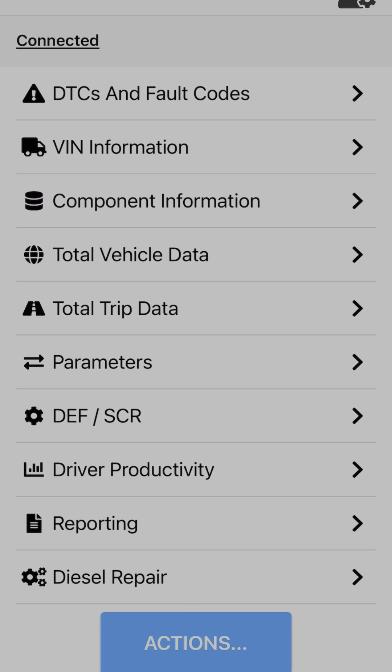So here we are opening up the TruckRx app, which is free to download either on the Android Google Play Store or via the Apple iOS Store. So we connect to our device. It's a Bluetooth connection. The first time you connect to it, obviously you have to set up a password and do some connection and identify it as yours. And sometimes there's an update that updates the firmware on the Bluetooth device.

But here inside your phone, you want to scan the fault codes, and you want to understand, okay, what's going on inside my truck's engine controller, transmission controller, brake controller, all the different electronic modules that talk to that 9-pin port under your dash. And you can see there's some fault codes, and my simulator is telling me that I got some engine hot shutdowns. It tells you the SPN number, and then the occurrences, as well as which item is causing the issues.

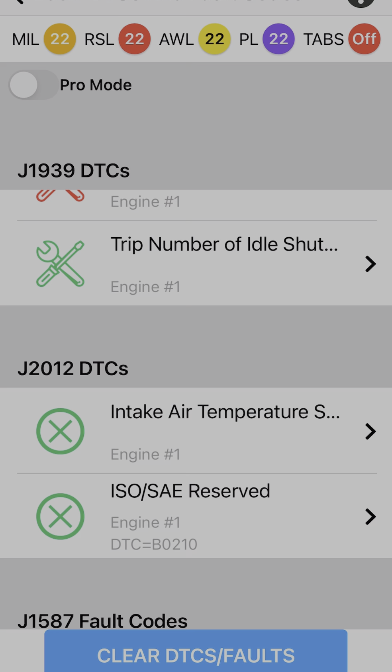And you can click on this repair. This big blue box tells you some additional repair info, and I'll go through that in a bit when I get to the last section. But all your DTCs from your engine controller, your brake controller, everything is all in here. You can hit the clear button if you want to clear them, and it will clear all these fault codes.

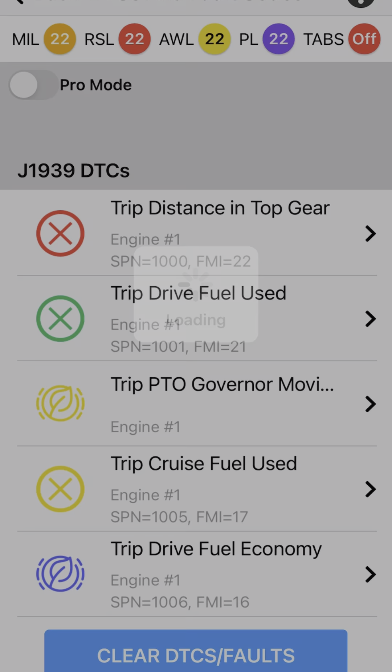Now, obviously, this particular simulator is just going to keep spitting them out because that's what my simulator's programmed to do. So if you had a truck and you had a fault code, you'd clear it. They'd be gone until the next time they came back if you didn't fix the problem.

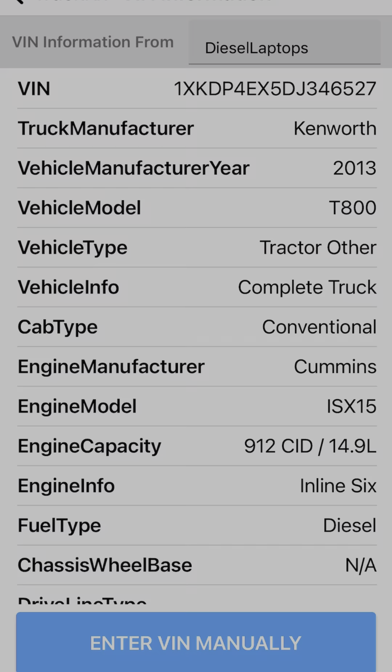Now, the VIN information is all there. It's in the ECU. It's pulled out. It tells you the kind of engine and all the information that you get from inside the VIN information database in your ECU. You can also go through and look at the components.

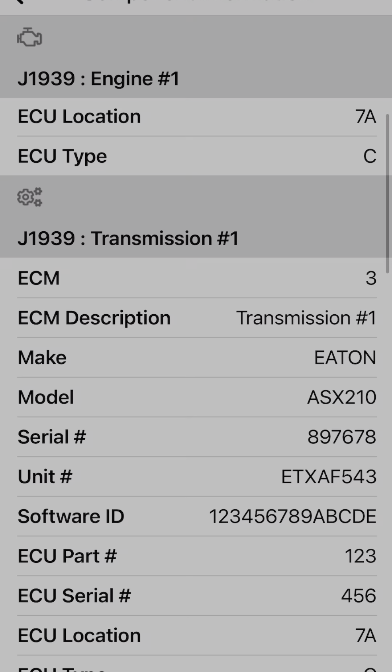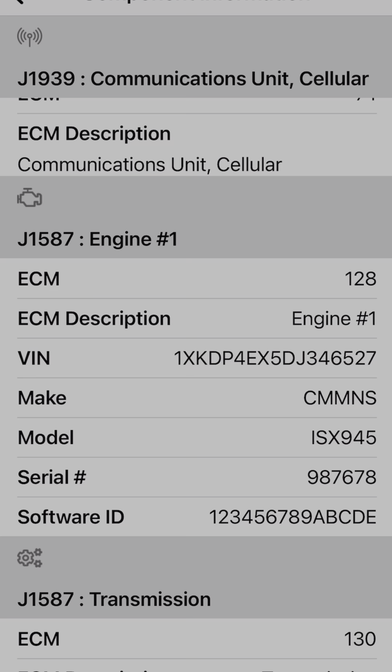Okay, so obviously there's an engine, there's a transmission, and that J1939, that's the protocol that these devices speak. Same with brakes, and then there's some communication cellular unit here. And then there's also 1587, that's an older protocol that the engines will also sometimes speak, and the TruckRx device can speak to that protocol as well.

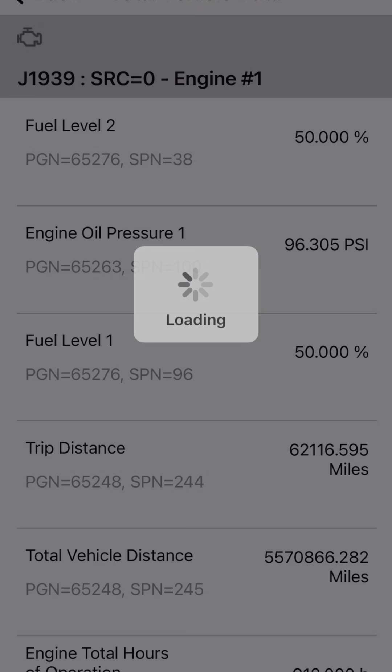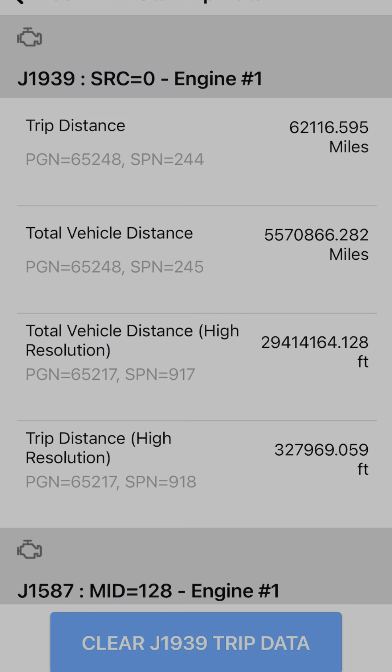Going forward, you can look at your total vehicle data, and you can understand fuel level and oil pressure and trip distance and some information just to help you figure out what's going on with your vehicle, as well as the trip data. And this is for the most recent trip, and here you can clear it if you want, and it'll reset that trip counter to 0.

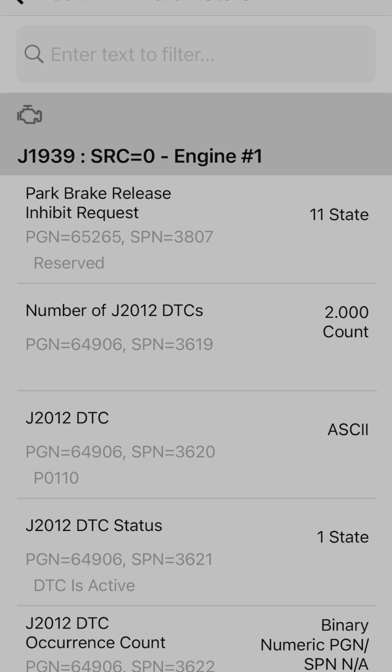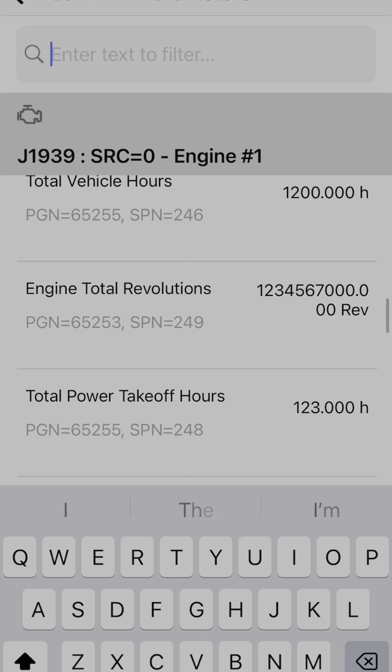In this parameter screen, you now get all of the parameters that your ECU, your TCU, all the controllers spit out. So this is quite a lot of data, quite a lot of different parameters. You can see I'm scrolling through it fast, and there's a lot of stuff happening here. So if I want to look at something related to my oil, I'm just going to look and see, okay, so here I'm in my transmission. Okay, how about my engine oil temperature? And I can see, okay, here's my oil temperature right now.

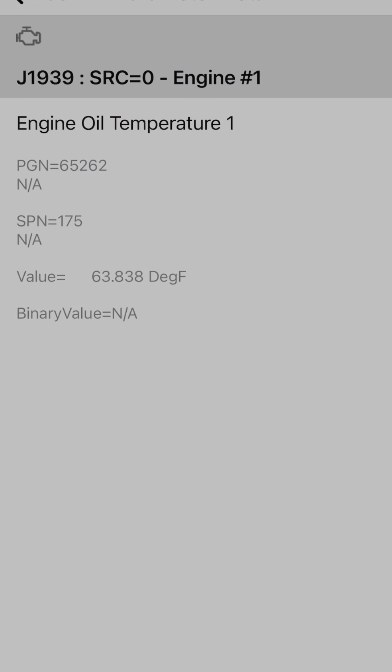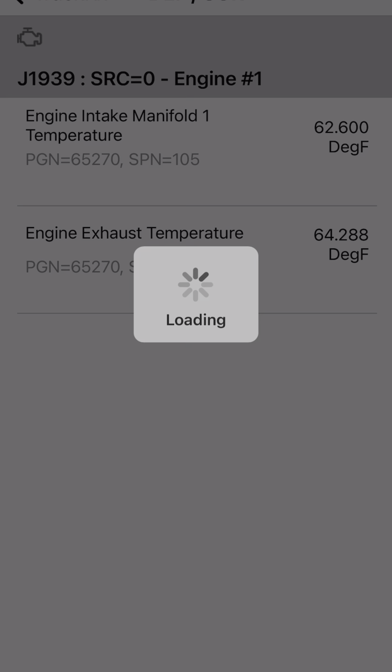And this is for debugging, advanced. You got an issue, you want to know what's going on. You can dial right in and figure out what all these different engine parameters are, and help you solve some advanced issues. DEFs and SCRs have their own set of sensors that you can look at, and you can see, okay, what's my exhaust temperature and what's my intake manifold temperature. And some trucks are going to have more advanced stuff in the DEF and SCR section than others.

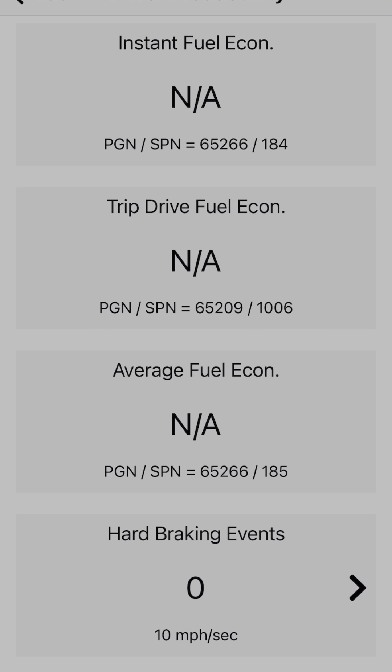There's driver productivity, where you can look at your fuel economy, your instant, and then your trip fuel economy, and then average fuel economy, and then hard braking events. And obviously, you can even reset the hard braking events from this app if you want to.

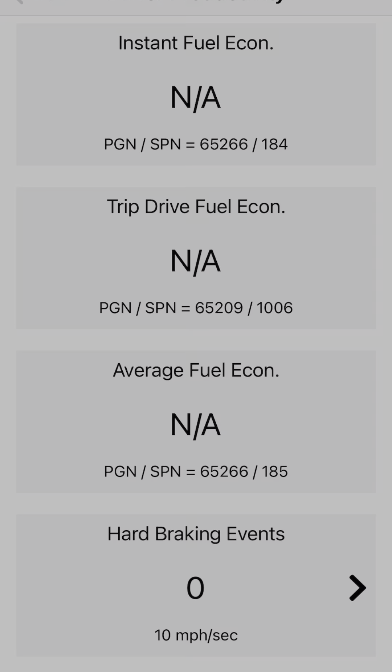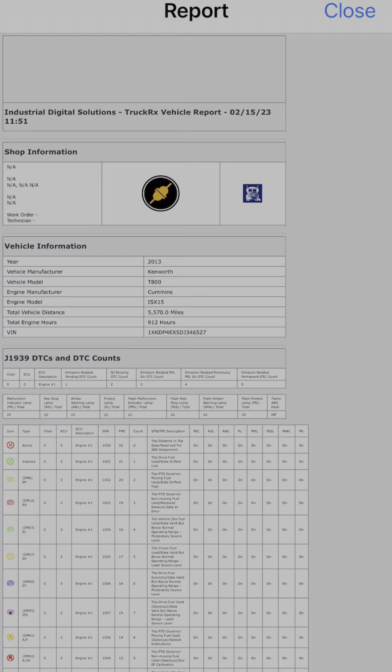And then reporting, if you have an issue and you want to sort of document, okay, what's my current issue? You hit the generate report button. It's going to create a report. And then here, when I go to my list of reports, I can pull it out and I can view it in my browser right on my phone. And I can say, okay, well, what happened when it generated this report? Which vehicle was it on? This is if you have multiple vehicles. You can look right away and see which one it is.

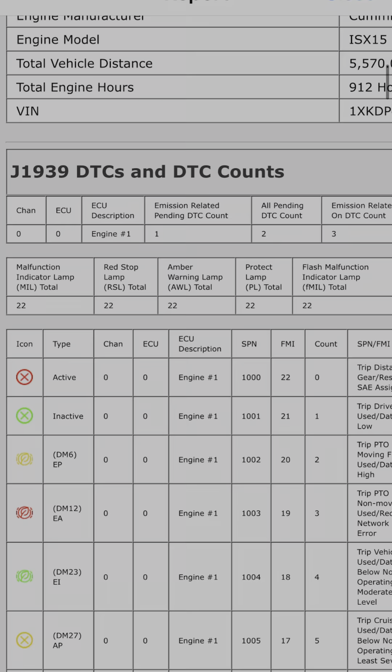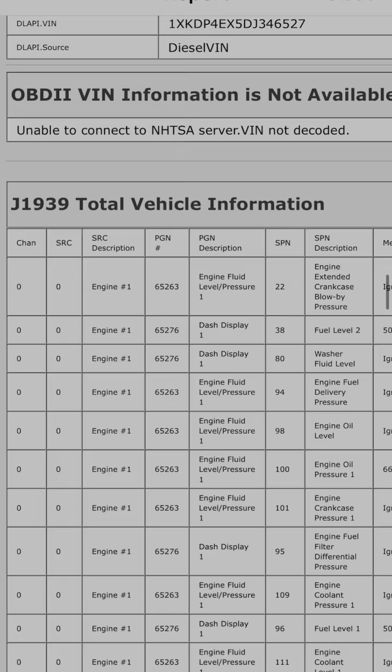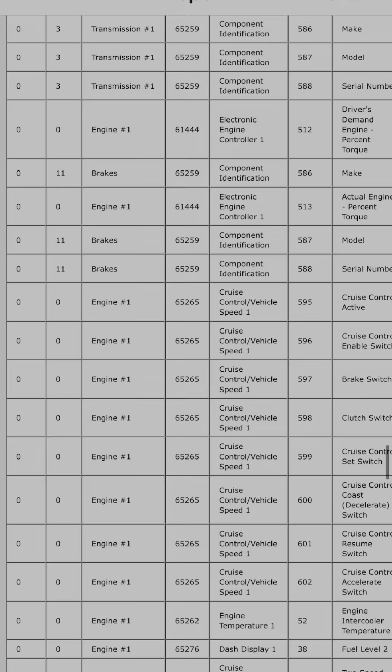What are my trouble codes? What are my DTCs? All right in here, as well as freeze frame data, all the component information, all the stuff that you see in the app. It all gets recorded, saved in this HTML file, which I'll show you in a minute. But if I get down to my parameter settings, I can look and I can say, okay, what was my oil temperature when I took this freeze frame? What was my transmission doing? Was my cruise control on? What's my engine oil level? What are my ambient outside conditions?

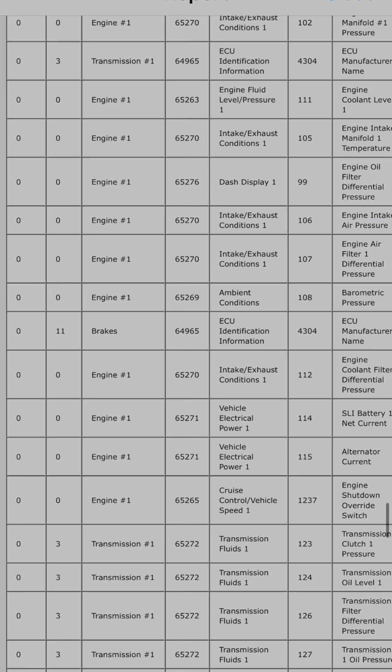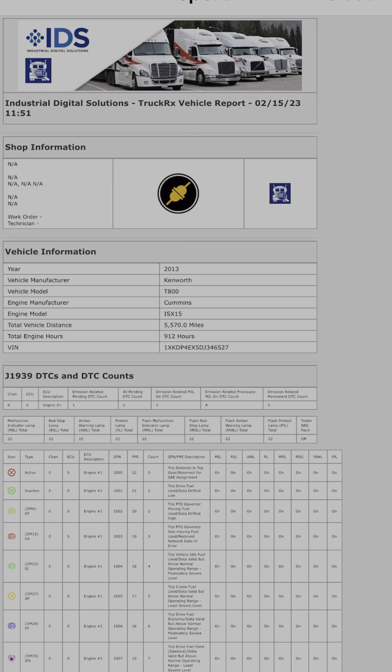What's the barometric pressure? So all of the information that's necessary for a competent mechanic to diagnose a problem, either when you're on the side of the road or you're in the shop, is right in this report, which then can be very quickly and easily emailed. You can email it to someone. I'm going to click there, and I'll just say, I'm going to email this report to myself or a mechanic or someone who can help you fix your truck and get back on the road.

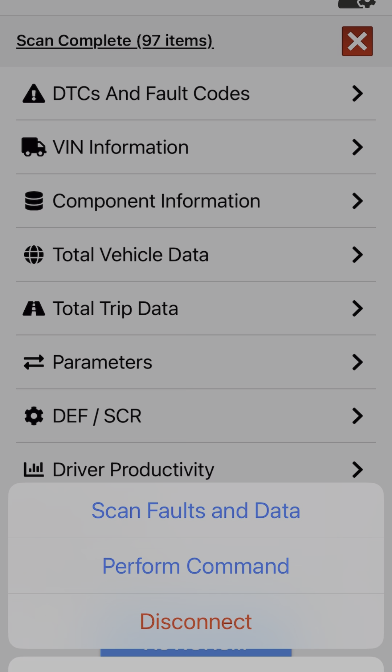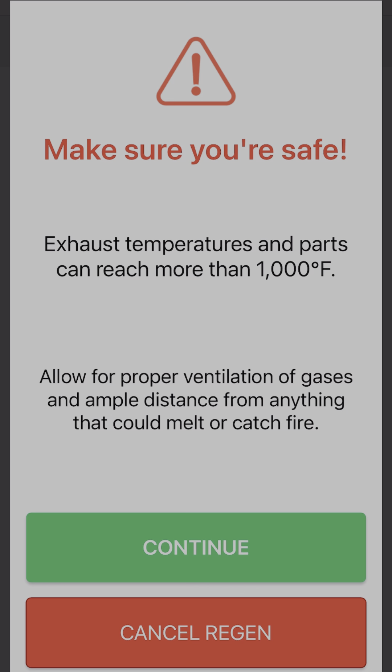And then the thing that a lot of people ask about is regen. So down here, you hit perform command. You can pick your make and model, and you can say, okay, I've got Cummins. I'm going to do a forced DPF regen. So this is now a process where it will force the DPF to go through its regen cycle, which is handy if you have a bunch of short trips and that light's going to come on later and force you to sit there for 20 minutes at the wrong time. Well, you can start the regen early, and obviously there's some safety questions to do this, but in the end, you're able to force a regen from your phone, which is a very, very handy feature.

And then the last thing is that there's Diesel Repair. This is with Diesel Laptops. They have these wiring diagrams and diesel docs and fault codes and labor time guides, and if you just create a free account in Diesel Repair, you can get to some of the information, and then there's additional information like very advanced diagnostics, like step-by-step troubleshooting guides, with a paid subscription. And you can arrange it through them, and it's a good way to do some advanced diagnostics on your truck.

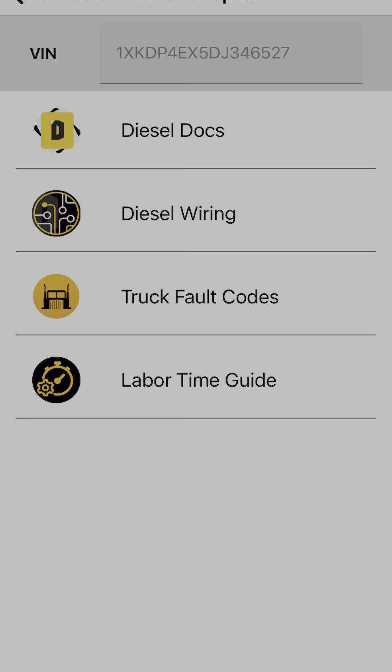So that's the TruckRx app. It's available in the Apple Store and the Android Store, and that's the TruckRx device overview.